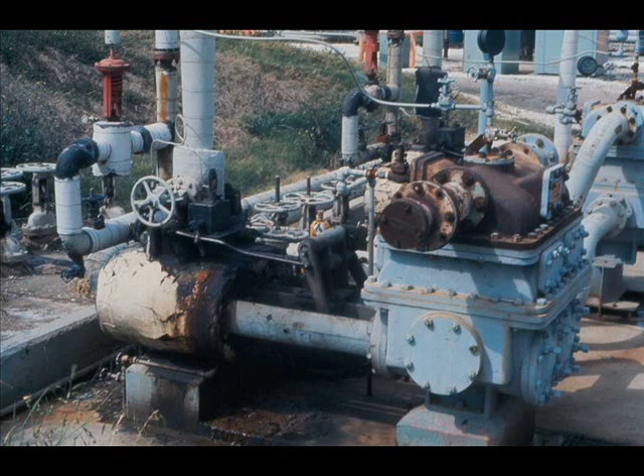One kind of reciprocating positive displacement pump is the piston pump. The piston pump you're most likely to operate is the steam-driven reciprocating pump. The steam end of such a pump is the pump driver. In the steam end, steam pressure operates one or more pistons in a back-and-forth motion.

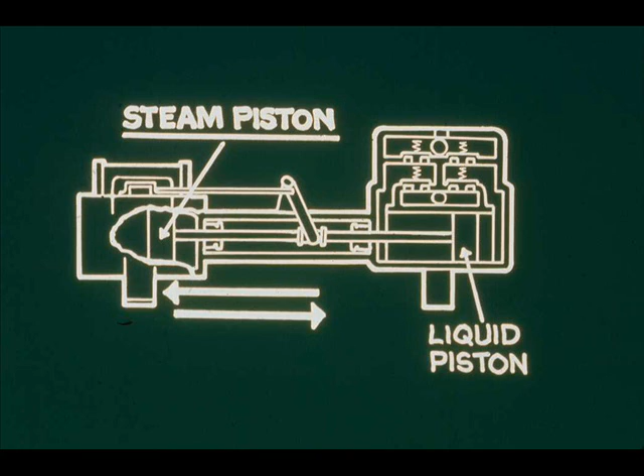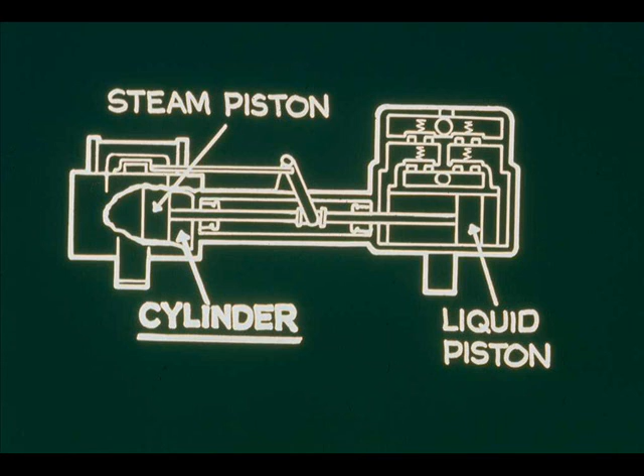Each piston works inside a cylinder. In many pumps, cylinders have linings that can be replaced readily when worn. The reciprocating motion of each piston operates valves.

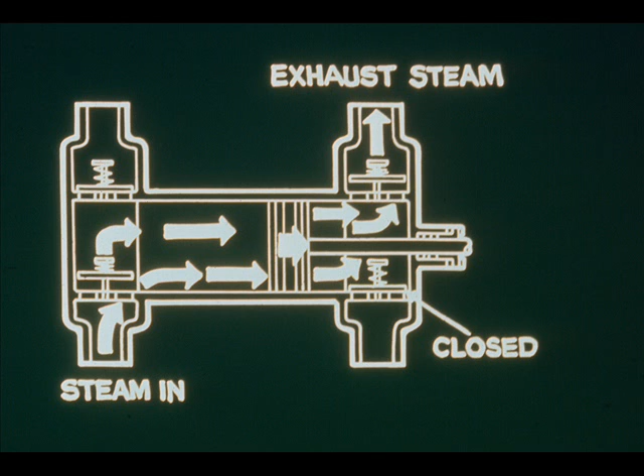One valve opens to allow steam in to drive the piston forward, while a valve forward of the piston opens to exhaust steam, and the forward steam inlet valve closes. Upon completion of the forward stroke, the forward steam exhaust valve closes, and the forward steam inlet valve opens.

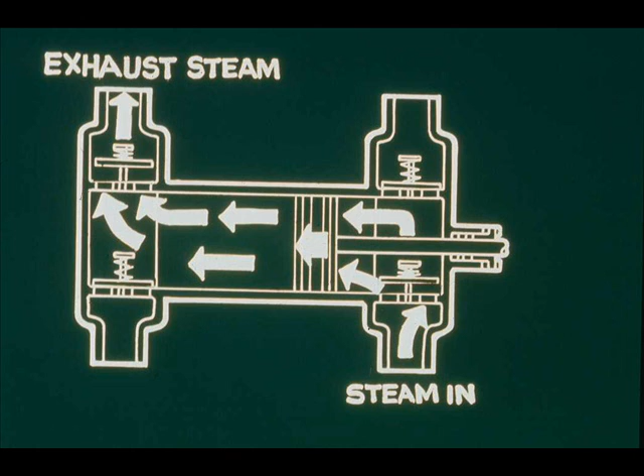Meanwhile, the steam inlet valve back of the piston closes, and the steam exhaust valve opens. Thus, each piston is driven back and forth.

A rod from each piston goes through a packing box or stuffing box. Packing prevents excessive steam leakage. Some leakage must be allowed to lubricate packing.

An adjustable gland holds packing in place. It can be tightened to minimize leakage, but must not be so tight as to produce excessive friction.

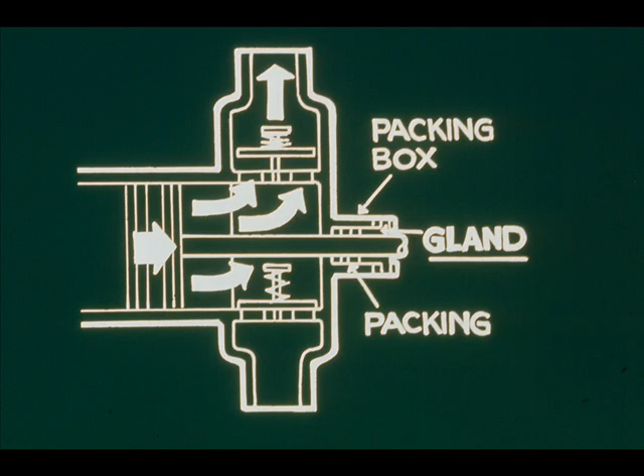Normally, an automatic lubricator supplies lubricating oil to major moving parts. Other moving parts must be lubricated manually.

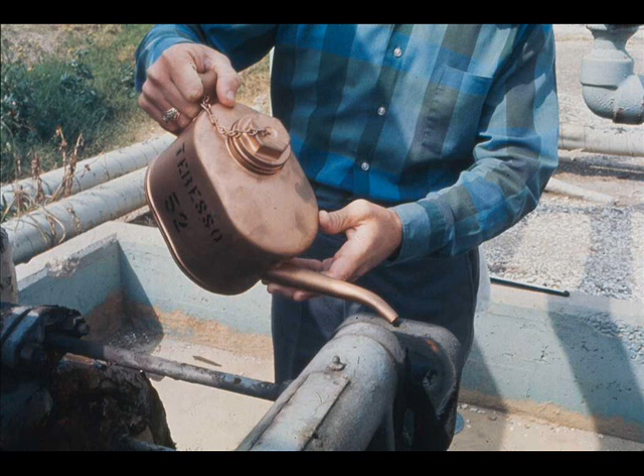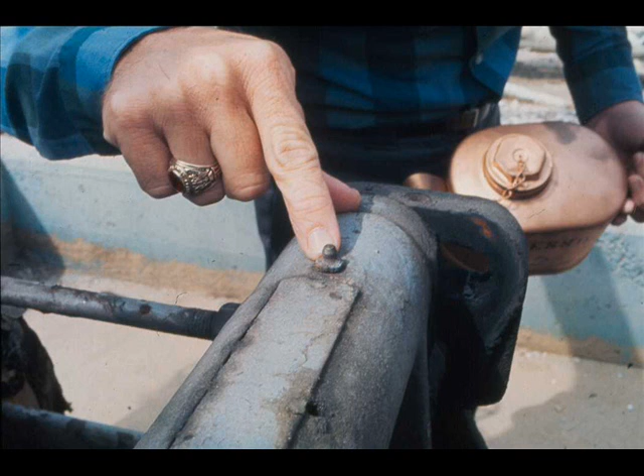The pump's steam end transfers power to the liquid end mechanically through rods and rocker arms. Since they are moving parts, rods and rocker arms must be lubricated frequently. In some cases, grease or oil fittings make lubrication easier.

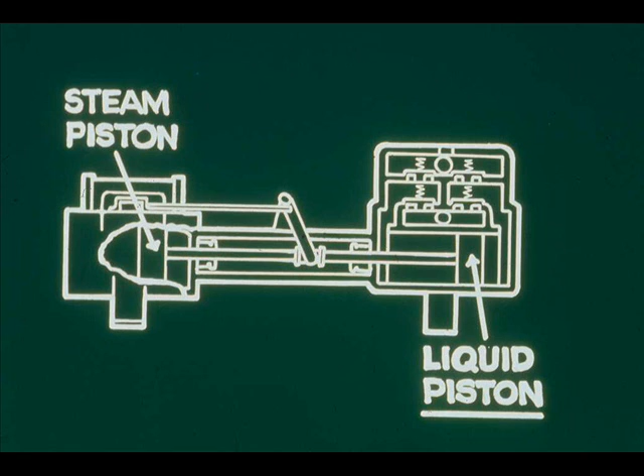The liquid end of a steam reciprocating pump is actually the pump. Like the steam end, the liquid end has one or more pistons, each operating in a cylinder. In many pumps, cylinders have linings that can be replaced readily when worn.

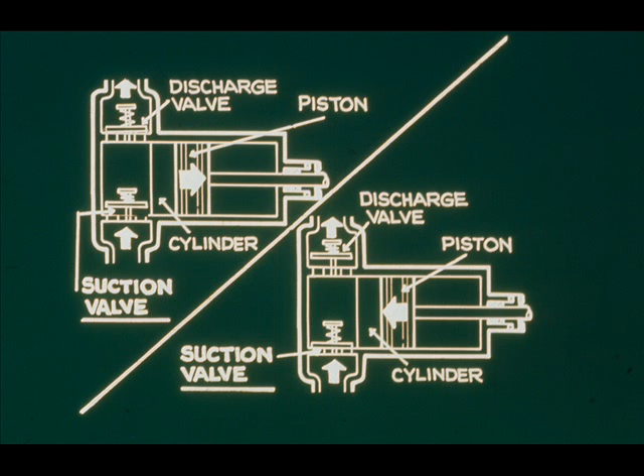For each cylinder, a suction valve opens to provide entry for oil on the suction stroke and closes on the discharge stroke, while a discharge valve closes on the suction stroke and opens on the discharge stroke.

A rod to each liquid piston goes through a packing box or stuffing box. Packing prevents excessive leakage of liquid. Some leakage must be allowed to lubricate packing.

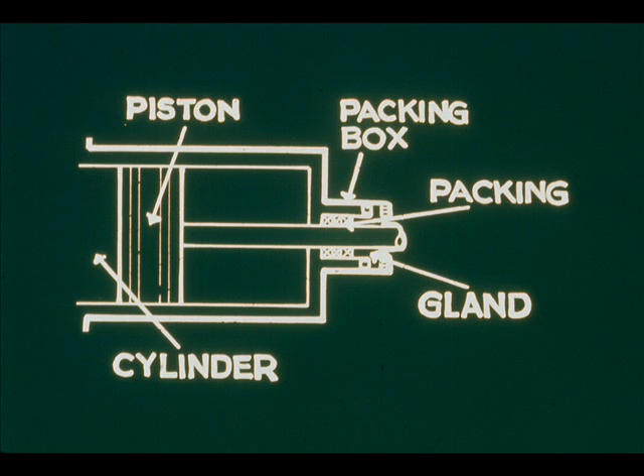An adjustable gland holds packing in place. It can be tightened to stop leaks, but must not be so tight as to produce excessive friction.

The liquid being pumped provides lubrication for internal liquid end parts. Automatic lubricators, grease or oil fittings, and manual lubrication take care of external moving parts.

The discharge pressure of some steam-driven reciprocating pumps is considerably higher than the steam pressure that drives the pump. Such pumps have pressure relief safety valves in their discharge lines. If discharge pressure reaches the safety valve setting, the valve opens, preventing excessively high discharge pressure.

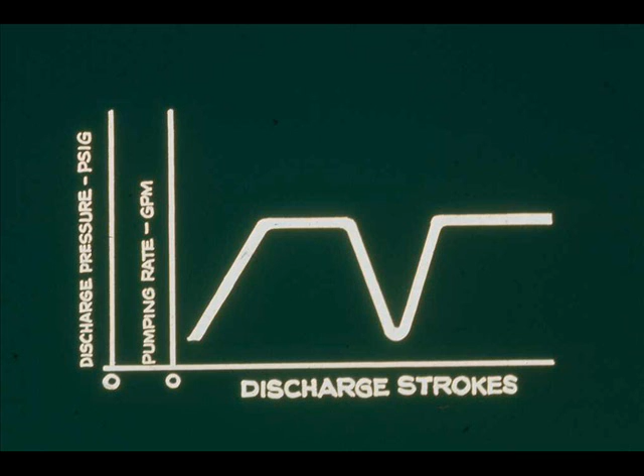A reciprocating pump's discharge pressure and pumping rate pulsate, going from near zero to maximum during every stroke. Where this pulsation is undesirable, a pulsation dampener, such as an air chamber installed in the pump discharge, can smooth it out to some degree. However, no device can give the smooth, even flow that is characteristic of rotary pumps.

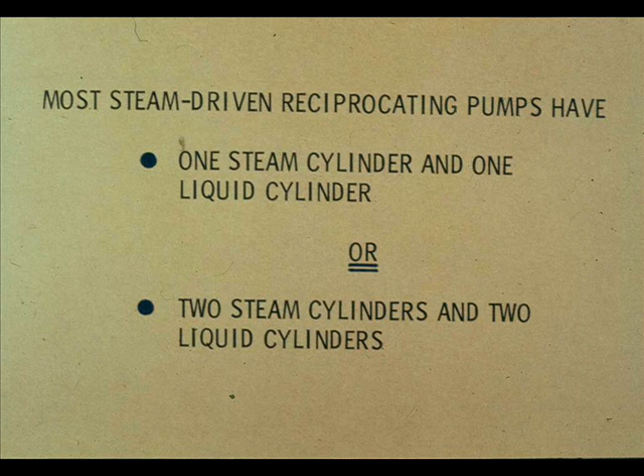The steam-driven reciprocating pumps you're likely to operate have one steam cylinder and one liquid cylinder, or two steam cylinders and two liquid cylinders. One way to classify these pumps is by the number of liquid cylinders. A pump that has one liquid cylinder is a simplex pump. A pump that has two liquid cylinders is a duplex pump.

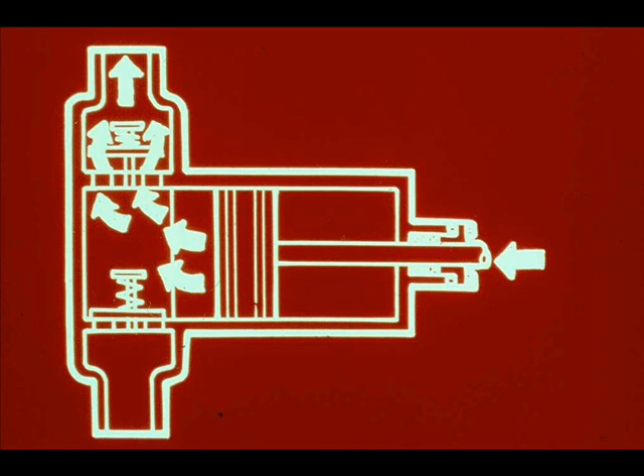Steam-driven reciprocating pumps are also classified as single-acting or double-acting, according to their stroke characteristics. In a single-acting pump, a piston discharges liquid only when it is moving in one direction. Pump pressure closes the suction valve, opens the discharge valve, and forces the liquid out of the cylinder.

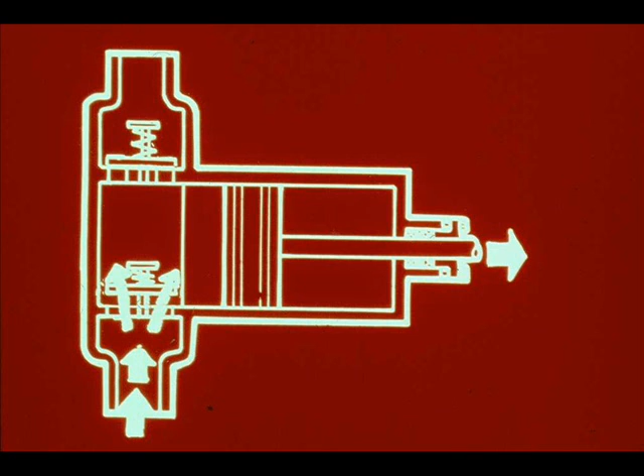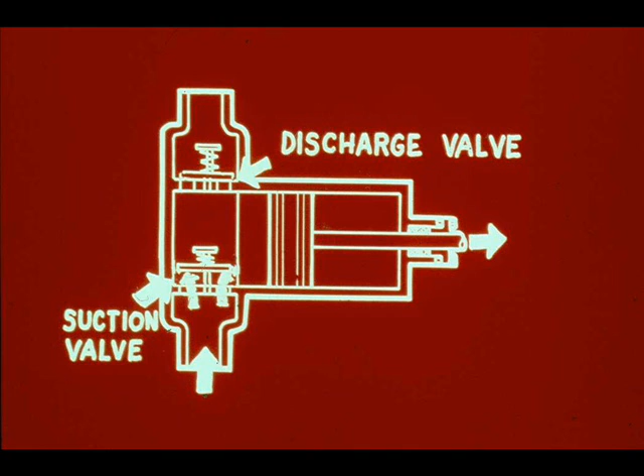On the return stroke, the piston sucks in liquid. Suction line pressure opens the suction valve, and discharge line pressure closes the discharge valve. A single-acting pump sucks in liquid on one stroke of the piston and discharges liquid when the piston strokes in the other direction.

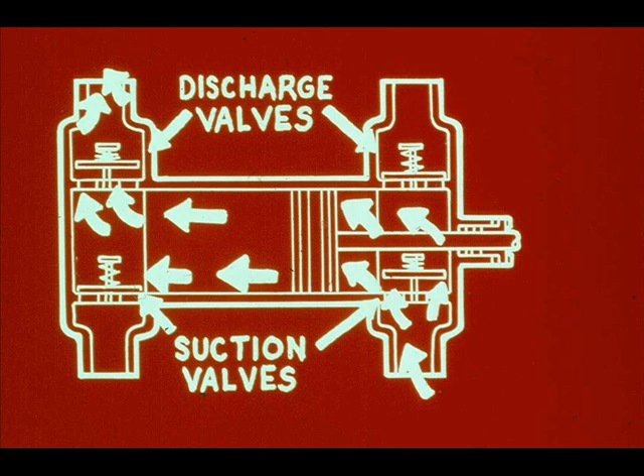A double-acting pump discharges liquid on the forward stroke of the piston and also sucks in liquid behind the piston on the same stroke. It can do this because each liquid cylinder has two suction valves and two discharge valves. On the return piston stroke, the same cylinder again both sucks in and discharges liquid.

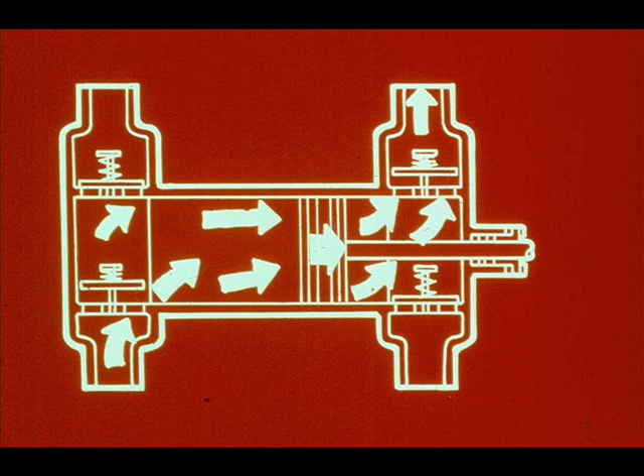Duplex pumps are usually double-acting. One piston makes a forward stroke, while the other makes a return stroke. But each cylinder sucks in liquid at one end at the same time as it discharges liquid at the other end.